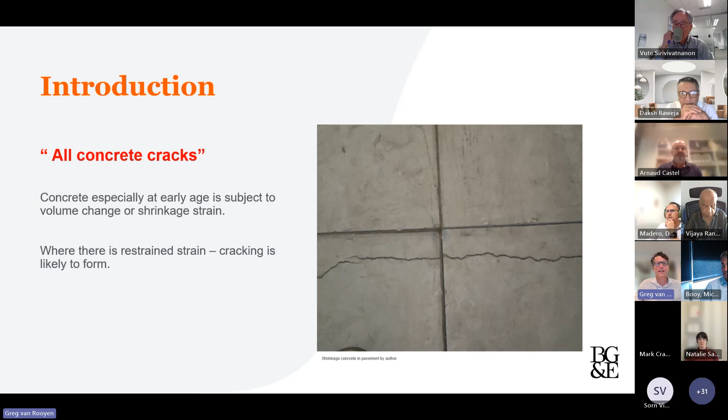We all know concrete cracks, and the old saying, all concrete cracks. But concrete is actually really subject to volume change and strain, and cracking comes about because the strain is restrained and held in place. So I suppose what shrinkage is, it's the volume change in concrete. There's quite a few mechanisms, and the work today, we're not really focused on thermal contraction and shrinkage. We're really talking about some early age and drying shrinkage. We typically talk about early age or plastic shrinkage in the first 24 hours or maybe a little bit more, depending on whose work you're looking at, and then drying shrinkage being the longer term reduction in volume through loss of free water in the concrete mix.

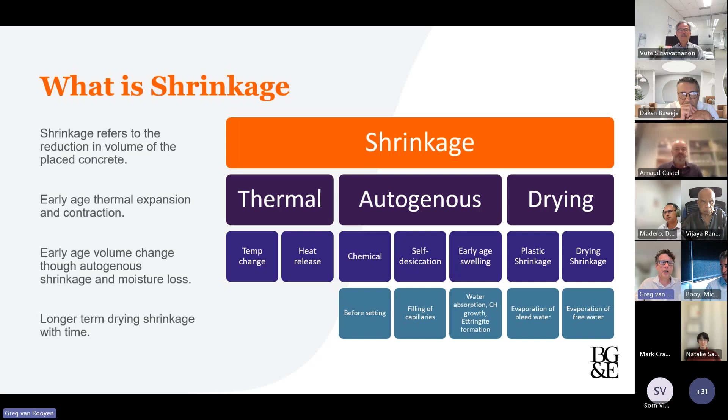Slabs on grade probably still make up, well, we think about 70% but most of the concrete placed, and really come down to problems with unplanned cracking. There's a little chat earlier about planned cracking being good cracking and unplanned cracking being bad cracking. And so the joints don't always work, and we relate this to a concrete problem and drying shrinkage.

Clearly, as discussed already, the data we get doesn't really match a lot of our field observations. From my time in a concrete supplier, dealing with complaints, if you did a Pareto chart of crack complaints, really plastic cracking followed by longer term shrinkage cracking make up, at least 75% of the types of complaints that concrete placers or concrete producers face every day.

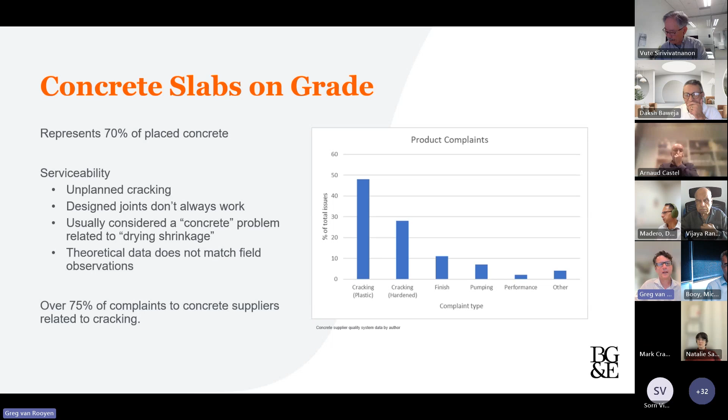So what do the standards have to say about this? We have AS 3600, and it provides some calculation of shrinkage in concrete.

It provides some numbers based on where you are in Australia and refers to the AS 1012.13 test, which is the drying shrinkage test. The standard does try to account for early age autogenous shrinkage, some basic shrinkage strain, and volume reduction. There's a fair range around Australia. The codes talk about some typical values, but in certain parts of Australia shrinkage can vary quite widely from different aggregates, and the standard talks about a plus or minus 30% range.

I guess the key thing though is the aggregate doesn't shrink much, and it's the paste in the concrete that shrinks.

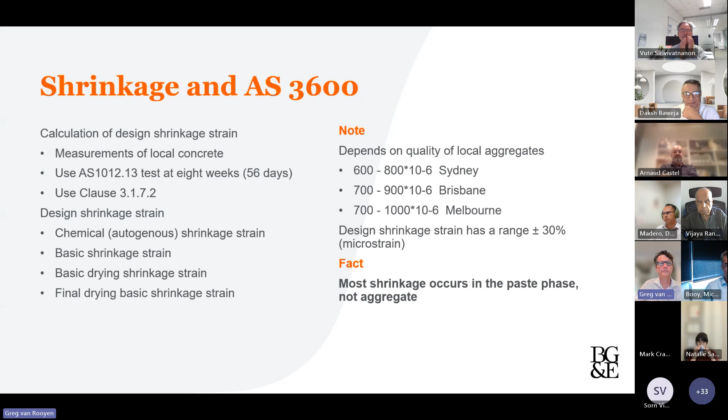So the drying shrinkage is a 56-day test rounded to the nearest 50 microstrain, and all normal class concrete needs to fall below 1000 microstrain. The origins of the test are really around selection of aggregate and ensuring you have a stable aggregate in the concrete, less so about the actual concrete performance. Some key points are that the shrinkage we're measuring in the test is after 7 days curing, and then it undergoes 56 days of drying, so it's a 63-day-old sample.

Again, trying to improve shrinkage through selection of a type SL cement. There's a 750 microstrain limit for that.

So as you can see, typically in those standards and methods, the allowance for shrinkage is actually quite high comparative to numbers you may see in a specification, with less than 600 being quite commonly specified to get a lower shrinkage or try and control cracking.

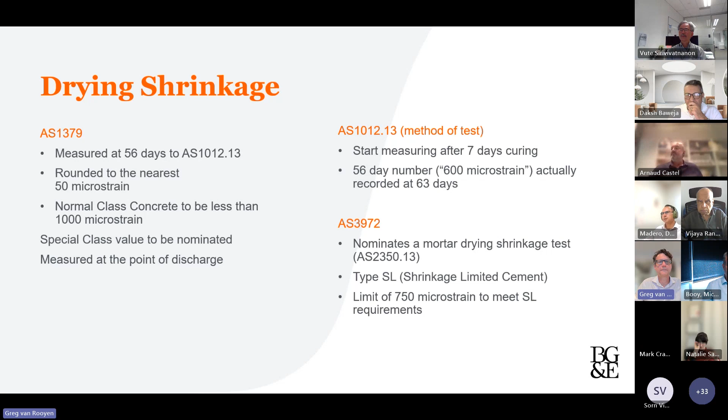Because of that, there's a tendency to want to put a tight shrinkage specification or requirement in a document to encourage, I guess, cracking to happen the way you want it.

Great picture there when you take a piece of unreinforced concrete and you give it a decent saw cut, the crack will happen in the cut.

But this doesn't always really work in practice. It's quite common to see cracking happen in an unplanned way. And the movement clearly occurs a lot earlier than what we're thinking in the standard, and I'll show you a little bit of that in a little bit.

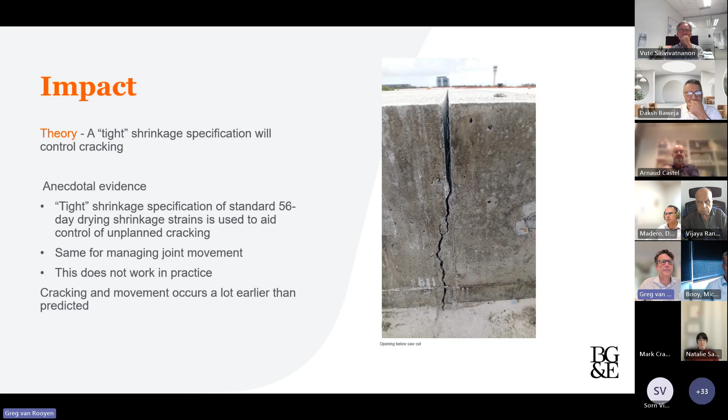So from the standard, it doesn't take into account any restraint or shrinkage that may occur a lot earlier in the concrete, and specifying or requiring lower shrinkage doesn't mean lower cracking.

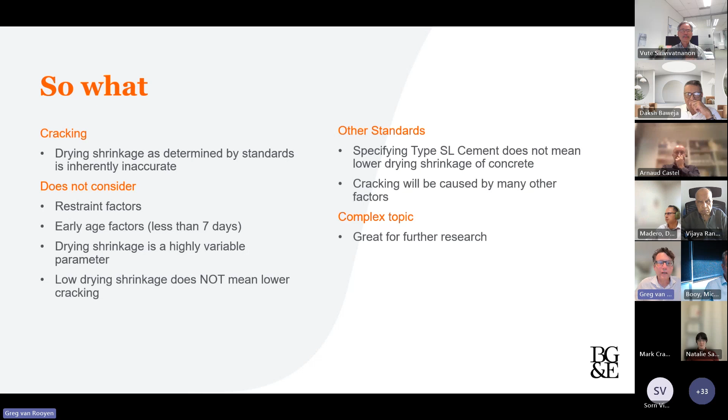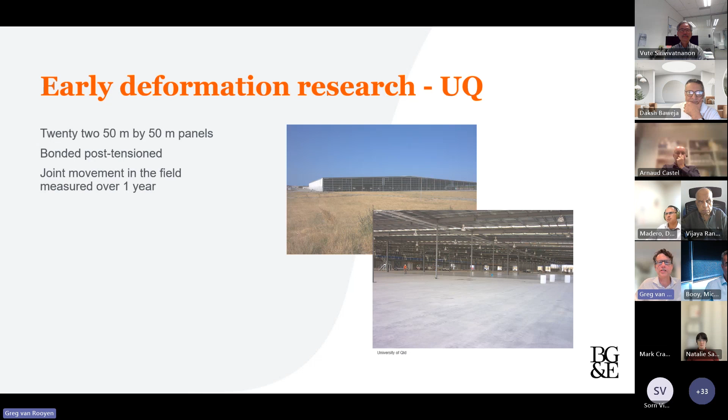There's more joints opening up more quickly in external pavements, but a key thing is that this behavior doesn't match the predicted behavior.

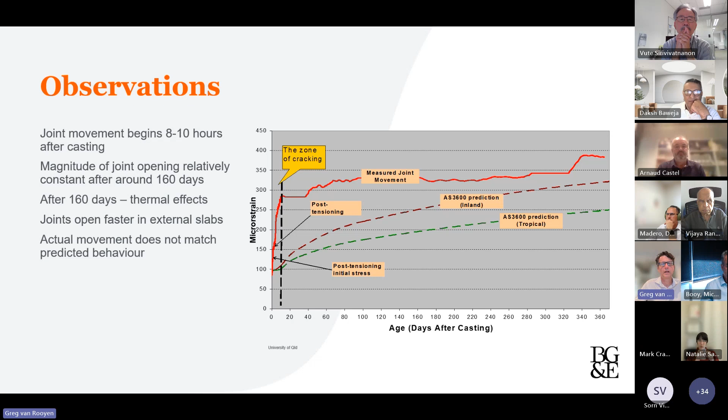What this research found is that there's a lot of benefit to slowing or stopping early evaporation, and that predicting shrinkage strains in real life was really difficult because of a number of things, including material properties, the environment, and construction practices. There's no real link at all between the drying shrinkage and the movements measured on site.

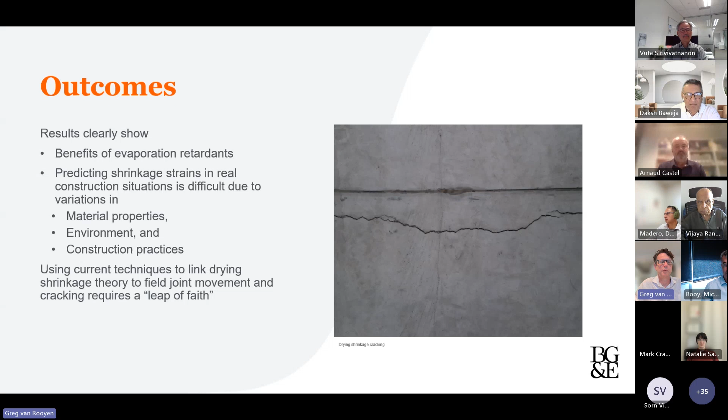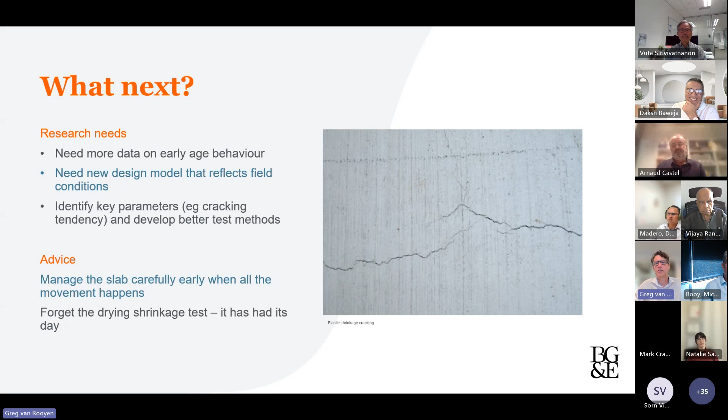So where to next? Clearly we need more research on this early behavior, and we need to understand it, and we need better models that reflect the conditions, and we need to identify some of these drivers of what's causing these issues. So the advice in the interim, till we see Arnaud's presentation, is that managing the curing and the early age is really important to limiting cracking, and really the shrinkage test is not the mechanism to control cracking in your concrete.

So thanks for that. I hope that sets the scene for everyone on why this is important research. So thanks.

And over to Arnaud. Thanks very much, Greg. Yeah, that's really set the scene for my presentation. Very grateful. Should I go ahead? Please do, Arnaud. Okay, I'll share my slides. And while you're doing that, I'll just say, look, we'll have opportunities for questions afterwards, and we'll defer till then. So please go ahead, Arnaud.

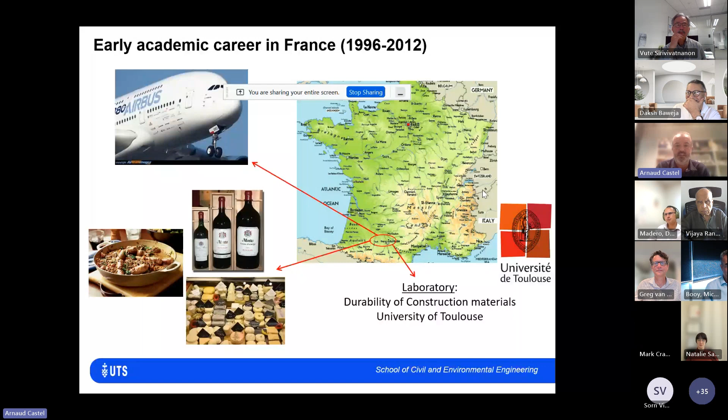Just a few words about me. I started my early academic career in France, in the southwest of France, in Toulouse. It's a very famous part of France for cheese, duck confit, and amazing wine, so I recommend anyone to visit the region. The lab I worked in was the durability of construction materials lab, so most of the colleagues, including myself, were experts in durability of concrete—corrosion of reinforcement, chloride, sulfate, and so on. It's also famous for the Airbus industry, where the big planes are built in France. I moved to Australia in 2012.

I joined UNSW, where I had the privilege to work with Professor Ian Gilbert, who is very famous for his work on creep, shrinkage, and concrete cracking. He's basically the one who created and implemented the models for shrinkage and creep in AS3600.

An important project we had together, combining durability and cracking, was an ARC linkage grant covering shrinkage, cracking, self-healing, and corrosion of reinforcement in blended cement concrete. I have to acknowledge that I've been learning a lot about shrinkage and creep by working with Ian. It was a great pleasure.

And then in 2019, sorry, it was a mistake—UTS, August 2019. That's when I moved from UNSW to UTS.

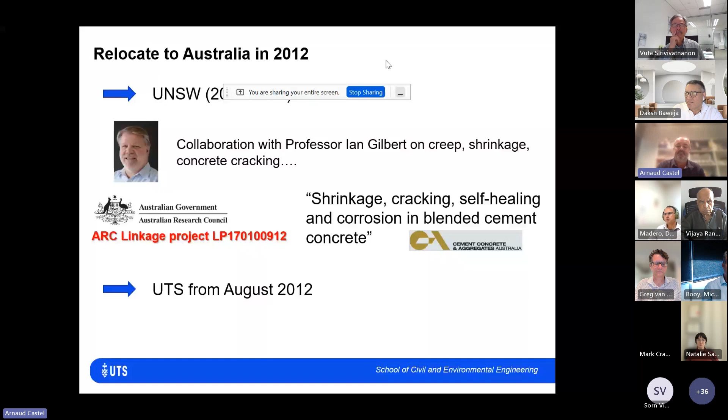Back to the topic. It's consistent with what Greg just presented: we're focusing on restrained shrinkage-induced concrete cracking, particularly on slabs where thermal effects are not that important. That's one of the assumptions. Today I will not include anything relating to thermal cracking.

The first assumption is that we are really interested in the period up to 7 days after the pour of the concrete. Those cracks are really bad—they're not planned, and there's no way to control the crack width. We know that corrosion of reinforcement in cracked concrete relies on keeping crack widths small, so self-healing of concrete can prevent corrosion. If you have wide cracks, that doesn't work. So those are really bad.

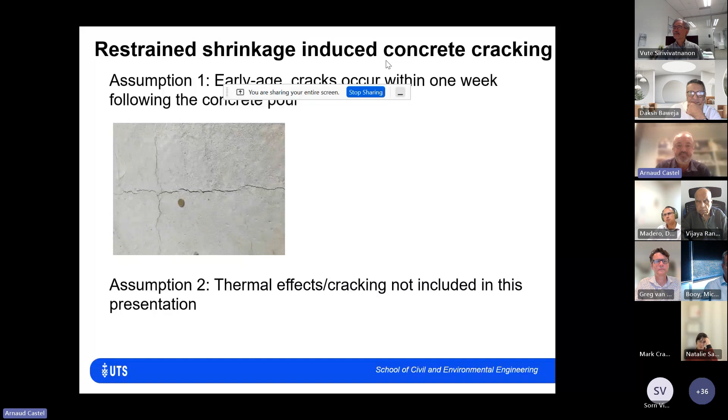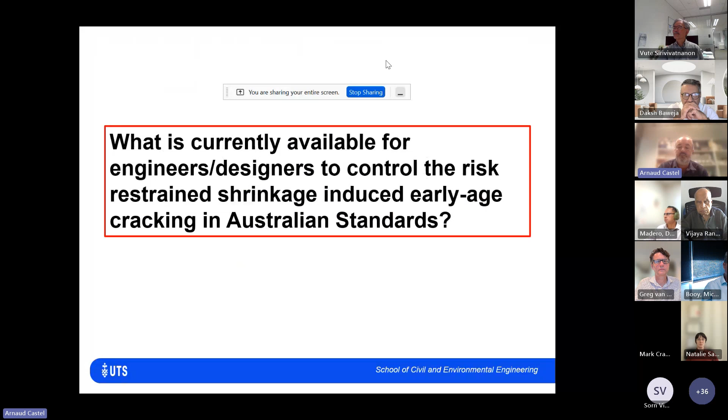What is available for engineers and designers to control the risk of restrained shrinkage-induced early age cracking in Australian standards? Greg already talked about it. I'm just getting back to the two tests we have for concrete.

We focus on concrete—the AS1012.13 drying shrinkage test, where specimens are stored at 23 degrees, 50% relative humidity.

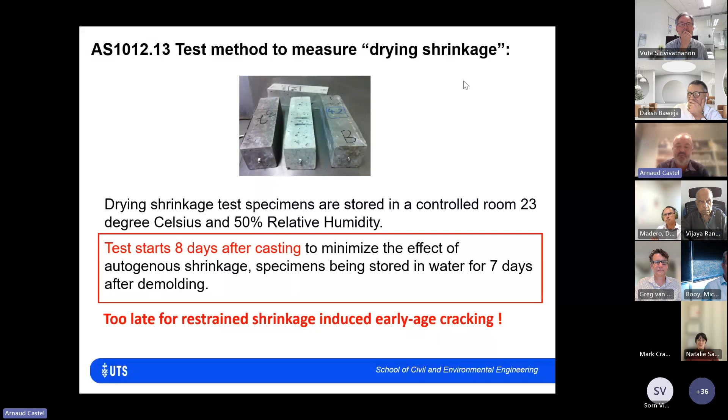It would be easy to fix: just change the standard to start measuring after 24 hours, and rename it from drying shrinkage to total shrinkage. But at the moment it's not. I agree with what Greg just said—it's not really useful for controlling early age cracking because we're measuring long-term shrinkage. That's the first problem with what's available to engineers at the moment.

The second tool available is the AS3600 models, one for creep, one for shrinkage. Shrinkage includes drying and autogenous shrinkage. Those models were developed by Ian Gilbert quite a long time ago. There were some revisions implemented in 2018, but the models still focus only on general purpose concrete, so there's no SCM effect included.

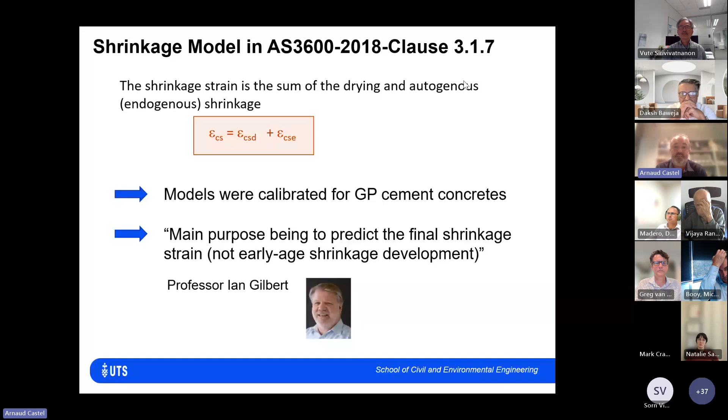One statement Ian always gave me is that the main purpose of those models is actually to predict the final shrinkage strain, not really what happens at early age. So don't be surprised if, when using the models, you don't get a good correlation with early age shrinkage—the models weren't calibrated and developed for early age. That's important—it shows that the models in the standards were developed for long-term shrinkage, not early age, which is a problem for what we're interested in today.

So if you do that, that's just a test result.

So I'll start to talk about test results from the CRC project, where we try to look at different concrete here. So we have a 32 MPa concrete. There's several of them: 0 is no SCM, then 30% fly ash, 40% slag, 60% slag, and see how the SCM content is influencing shrinkage.

Here, everything I will be showing is shrinkage where the measurements start at day 1, not day 7, and they're stored in a standard condition. So what we can see is that at long term, yes, there's a difference, 20-25% for concrete with SCM.

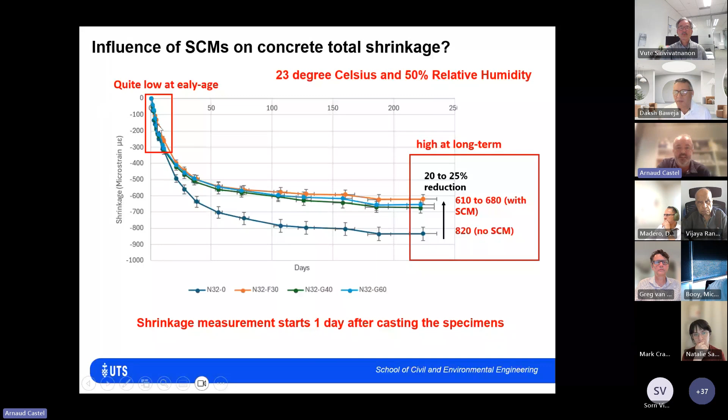Not much difference at early age. Well, if I could zoom, you will see a difference, but it's not as much as for long term. So yeah, that's already good to know. We're not seeing a lot of influence of the SCM for early age, for that example at least.

And now, Greg mentioned already that we are doing tests in standard condition, 23 degree, 50% humidity. How does that reflect what happened in the field? The only thing we can do using the models, AS3600, is to include that

K4 coefficient, which is relating to the environmental condition, where there's 4 of them, arid and interior. If you compare those two, interior will be close to the standard condition, something around 23 degrees, 50% humidity. Arid will be much drier and hotter, maybe 35 degrees, 20% humidity. So a very different climate, but the value of the K4 coefficient is not that different. It's 0.7, 0.65. So basically, according to the model, there's not much difference in terms of shrinkage, depending on those two standard environmental conditions.

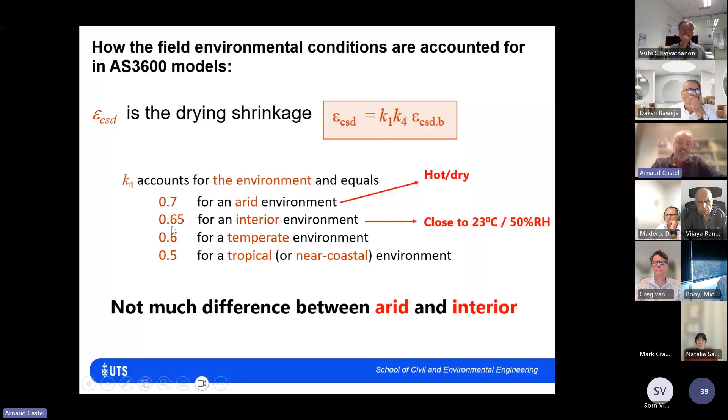But keep in mind that this is a model for long-term shrinkage, not for early shrinkage. Okay, so we did a test, a simple test.

We had specimens, the same specimens. Some of them were in standard condition, 23 degrees, 50% relative humidity. And another set of specimens were stored in a different room with a temperature of 38 degrees and only 20% relative humidity. So very different exposure condition, let's say.

A good way to basically assess how severe the exposure condition is, is the water evaporation rate. Everybody knows this chart. So the water evaporation rate for standard conditions, we try to assess as well the effect of the wind speed, but I won't talk about that today. You see the fans here. So here there's no wind at all included.

So if we compare the water evaporation rate at 38 and 23 degrees, it's roughly almost 4 times more water evaporation rate. So the question is, how is that influencing shrinkage?

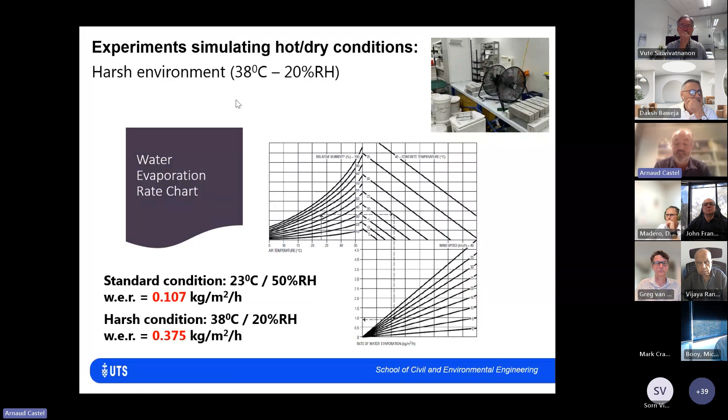So that's just one example of test result we had. That's still a 32 MPa concrete, no SCM, and in red is the shrinkage, total shrinkage at 38 degrees, and in blue is the total shrinkage at 23 degrees. We're measuring after 1 day, so it's total shrinkage, and we see a really important difference at early age,

as you obviously see between the blue and the red, and it was expected. And then after a while, well, there's not much difference. The two shrinkages are pretty similar.

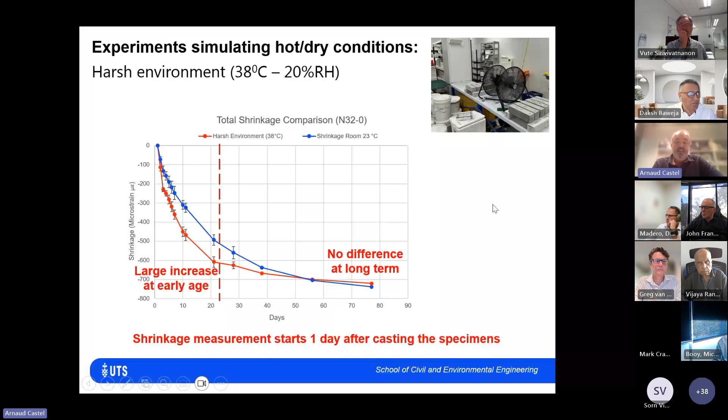So here I'm presenting the difference between, so it's shrinkage at 38 degrees minus shrinkage at 23 degrees. I'm just talking about that 32 MPa concrete today, and there's 4 of them. One is the 0, always no SCM. Then there's a 30% fly ash, 60% slag, a 40% slag.

So what we can see is that the difference here is in microstrain, but I also added the increase in percentage between the shrinkages measured at the two conditions. So what we can see is that regardless of the binder composition, the peak time, when the difference is maximum, is between 5 and 10 days, which is within the range of early age cracking time. Not much difference depending on the binder composition.

Composition-wise, it's a 70 to 80% increase in shrinkage, which is a lot of difference. At long term, past 50 days, not much difference anymore. All the shrinkage results are merging together more or less.

So the conclusion of this test, and it's consistent with the result we have with the 25 MPa or 60 MPa concrete, basically the same: the K4 coefficient in the standard is not able to capture at all the effect of that increase in water evaporation rate that will happen in the field just because it's a hot climate and a dry climate. Okay, that's not possible to do it with the standard.

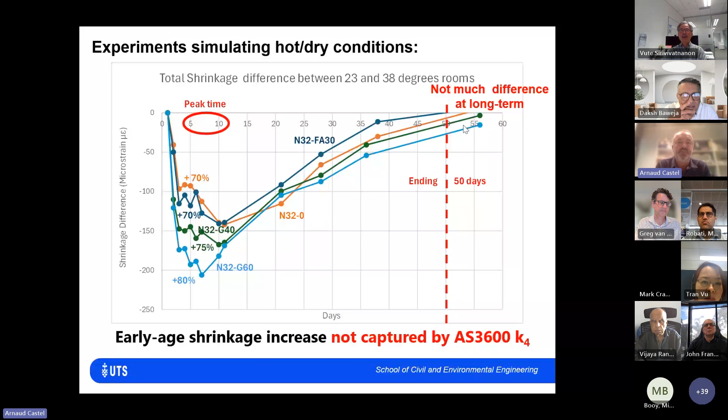We are still looking at your experiments simulating hot, dry conditions. Are your slides moving? It's moving on my screen. They're sort of frozen on ours. Okay.

Yeah, sure, I have a question for Greg. In one of your slides you were talking about the benefit of evaporation retardants. I was wondering if you could elaborate on the different tactics and evaporation retardants you're seeing, maybe more experimental ones coming into the market, if you have any insights on that.

No, it's probably more general, wasn't really product specific. The key is that a lot of that early age movement is related to moisture loss. So at this point, any action you take to retain moisture in the concrete would be beneficial. That's between limiting early age evaporation and getting curing in place as soon as practical, probably the best advice you can give.

Minimizing the potential for cracking. And as we know, even with best practice, you still end up with cracking sometimes. It's quite a challenging thing to overcome.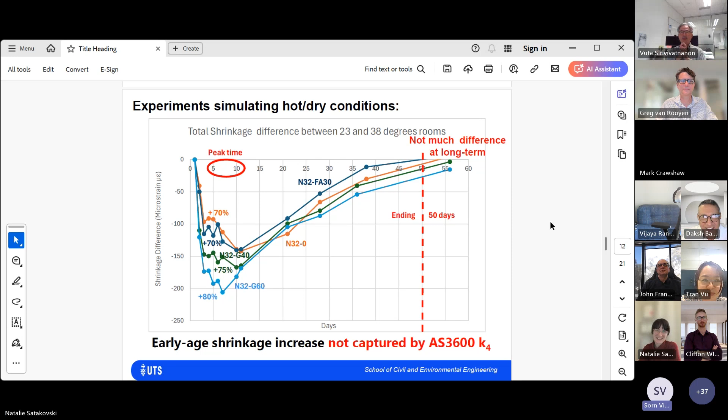He's basically offline, but he's actually coming back on again. I don't know what's happened at poor UTS, but not only did we lose Arno's slides, we've now lost Arno, so hopefully he's reconnecting back. Okay, can you go to the next page please? Yeah, so we know what the next page is. Yeah, okay, alternatives, okay.

Arno, are you back? I am back. Okay, that's good, I'll pass back to you.

Okay, so we didn't see the beginning of this slide, which showed what we have available, so that everyone could see that. Now the next step is what solution we can propose, or at least what solution we're working on in this project. So, alternatives.

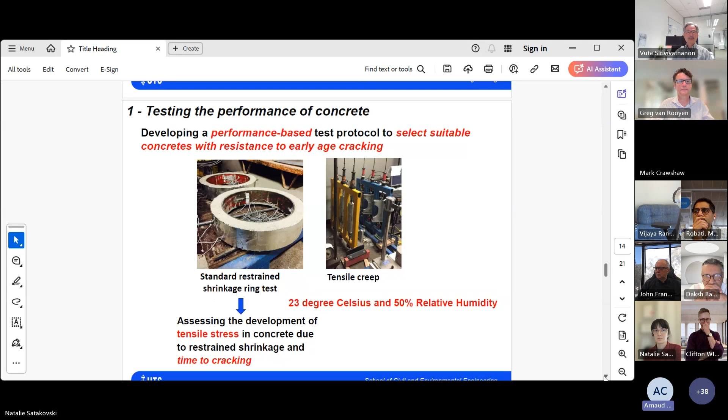Next slide please. So you've probably heard me talking about that ring test. I'll be brief. That test is really about testing the performance of concrete, specifically targeting early age cracking, just like we do with other durability tests. What we try to look at is how long it takes for the concrete ring to crack in standard condition, 23 degrees, 50% humidity.

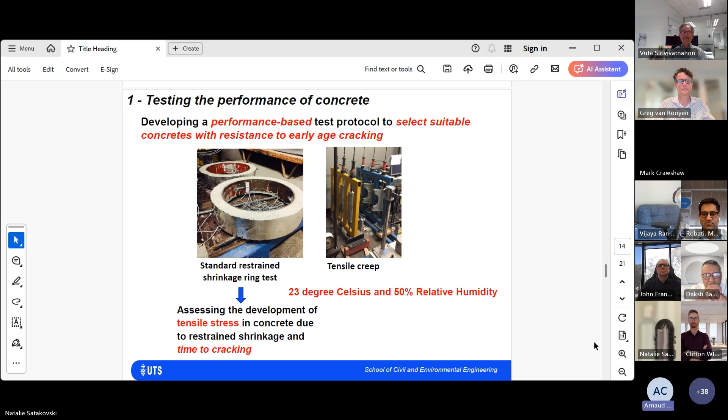Next slide please. That's important. We have been testing a lot of different concrete with different strength and different binder composition. The criteria is no cracking before 7 days, so R7. As you can see, there's a lot of concrete that are actually cracking before 7 days. Only a few of them are not cracking.

I'm not going to discuss today, because we're going to run out of time, the specificity of the mix design, etc. But obviously you can see that fly ash is pretty good for delaying early age cracking, and slag is not the same at all, so it's more likely to crack early. Increasing the compressive strength of the concrete is not a good thing either - all the concrete at 40, 50, and 60 MPa, except for the fly ash, are cracking. But anyway, that's just to highlight that there's a lot of difference in terms of performance between the different concretes we're using, and it's better to use a concrete that is likely to perform well.

That's the purpose of that type of performance-based testing. Importantly, the concrete that is not cracking within the first 7 days is the one performing better, but that doesn't mean it won't crack in the field. So you have to keep in mind that the testing condition is a standard testing condition.

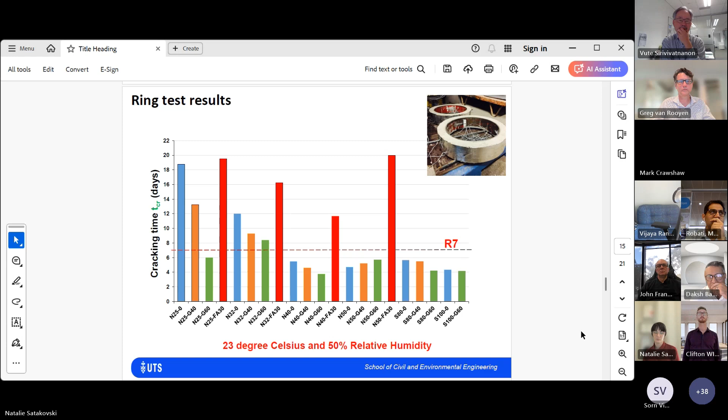It's 23 degrees and 50% relative humidity. So if you don't somehow include what the water evaporation rate is the day of the pour and a few days following the pour of the concrete, we're never going to be able to control early age cracking. That has to be part of the work of engineers, to consider case by case what's going to happen the day we're pouring the concrete. Next slide please.

So, in addition to selecting a concrete likely to perform well, the next stage is modeling the actual behavior, the development of stress in the concrete due to restrained shrinkage. I recommend this document, the Z7, Concrete Cracking and Crack Control, that probably everyone knows. Ian Gilbert has been contributing a lot to that document, and that's the base of the modeling we're developing in this project.

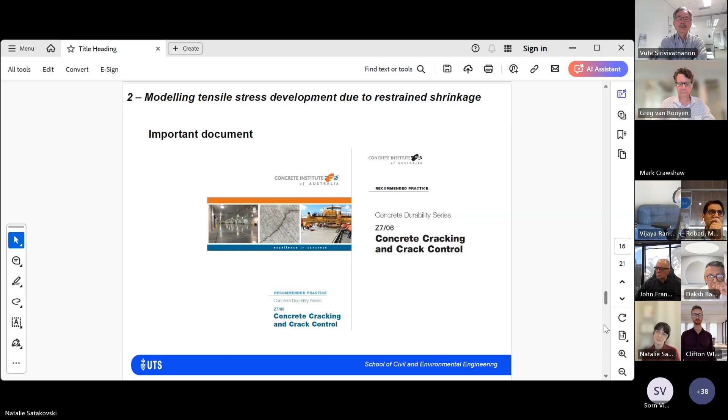Next slide please. There's different types of restraint to shrinkage. Here I'll talk about just slab, where the shrinkage is restrained by the reinforcement - the bond between reinforcing bars and concrete is restraining the shrinkage. The degree of restraint is dependent on the reinforcement ratio: the more bar, the more reinforcement, the more restraint.

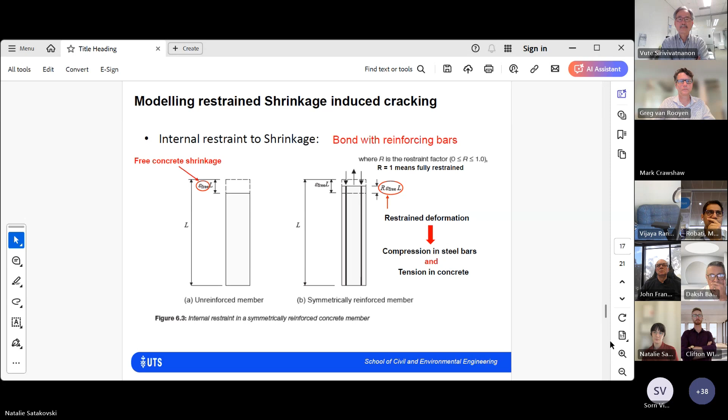Next slide please. I'm not going to get too much into the detail, but that equation in the document allows us to calculate the stress in tension in concrete due to restrained shrinkage. The important parameter here is the free shrinkage. The free shrinkage cannot be calculated using the Australian standard model - you're not going to get anything right doing that. This free shrinkage must include the effect of the field condition, so the water evaporation rate.

We have been working on that for a while now, so we have a way, with some assumptions that will have to be made, to determine what the water evaporation rate is going to be the day following the pour and a few days after that. But it's possible to include that effect in the calculation of the free shrinkage. So that's what we do.

As I said, concrete creep in tension is extremely important, so that's included as well. We have developed tensile concrete creep models that include the effect of fly ash and slag, so we're pretty confident with this one. The time-dependent increase of the elastic modulus of concrete is very important. And finally, that's more the structural design - the reinforcement ratio is governing the degree of restraint. So that's all that needs to be included in that modeling.

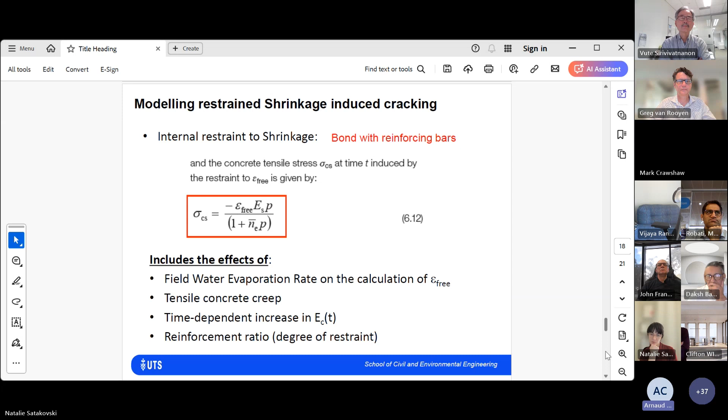If we want to be able to compare accurately what is the stress in the concrete to what is the tensile strength in the concrete. Next slide, please. So at the moment, that's just some simulation results we have done using that model.

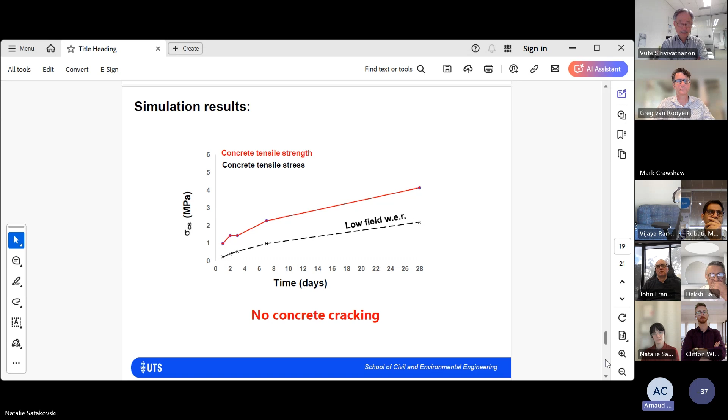And I think it can also be very useful to actually design the duration, the minimum duration of concrete curing.

By applying curing, there's a good way to limit a lot of drying shrinkage. There's still autogenous shrinkage going on, but if you apply curing in that case for 3 or 4 days, it's likely that will delay the increase of tensile stress in the concrete for 2, 3, 4 days. And when drying shrinkage starts again, that will leave enough time for the tensile strength of the concrete to be high enough and avoid cracking. So that's a tool that could be very helpful for designers to better control early age cracking through curing, because at some stage, if the water evaporation rate is too high, without curing, that's not going to work. It has to be applied. It's just a way to have better control of what we are doing.

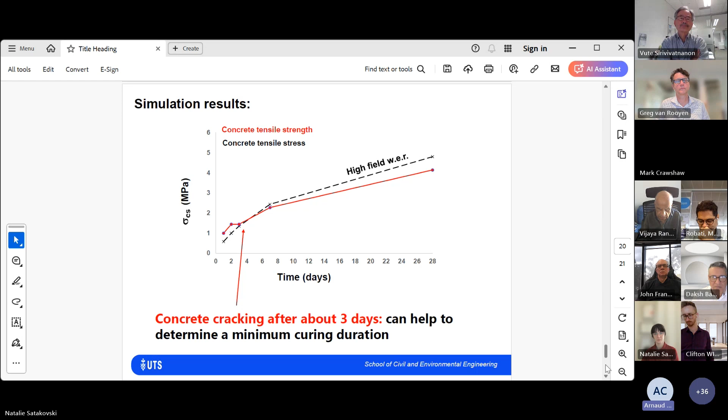Thank you for your attention, and sorry for the problem we had.

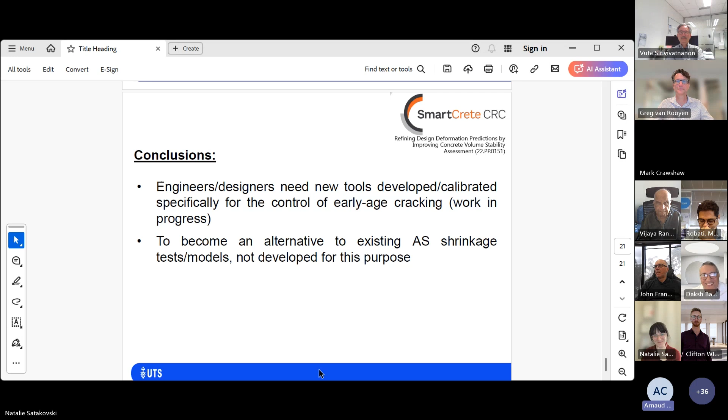We had that one about the admixture, but look, we've just got the presentations now. We have access to Arnaud and Greg, so I open up the discussion on anything that's been raised. If you like, Arnaud, there's one I want to ask you, and that is, how did we get to... do you know the history, and I thought by some of your ARC and AS 3600, or the work you did with CCAA, what's the background?

How did this test actually come into the standard? The test in the standard, you mean the shrinkage test? Yes, the AS 1012.13. No, I wasn't born when... Okay, no worries, I'm not quite sure now.